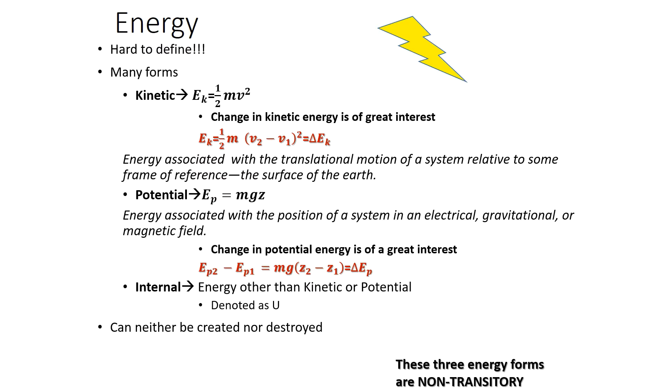Internal energy is any energy other than kinetic or potential energy. So don't ever forget that. And it's denoted as U. And one thing to remember, just like matter, energy can neither be created nor destroyed, but it can be converted into some other form. And we see that a lot of times in life. These three energy forms are non-transitory, and we'll get into talking about what non-transitory is in the lecture.

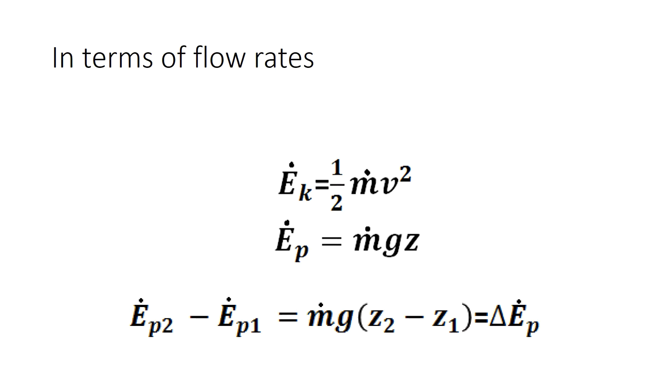In terms of flow rates, we simply just put a dot over things, and we've seen that in the past. So the rate of change in kinetic energy is given by 1/2 times the mass flow rate times the velocity squared. And the change of potential energy is the mass flow rate times gravity times z. We can split this out a little bit, where we express our change of potential energy in terms of changing our z height. And we can do the same for our kinetic energy, where we change the velocity in terms of rates.

Energy crosses our system boundaries in two ways: heat and work are the ways that energy crosses system boundaries, and the direction it was transferred is denoted by sign. So if we add heat to the system, our value is positive. If the system's giving off heat, it's negative. If the system does work, it's positive, and if work's done to the system, it's negative.

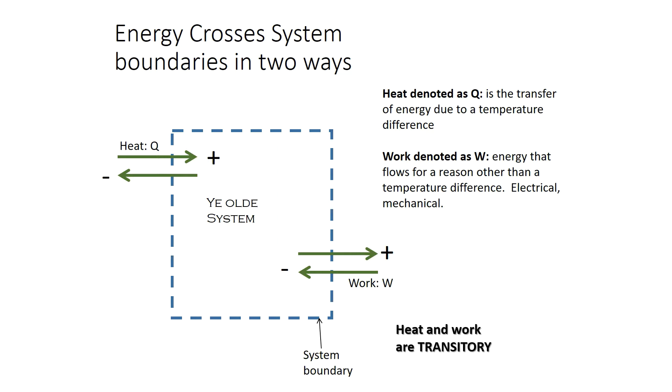And so work, I like this definition: energy that flows for a reason other than a temperature difference, electrical or mechanical. And heat is a transfer of energy due to a temperature difference, and that's denoted as Q. Heat and work are transitory, and they're transitory because they cross the system. Kinetic and potential energy don't really cross the system.

We have types of systems. We have open, so mass and energy cross system boundaries, and most of the problems we have done, like our ore refining problems, are open systems. Closed systems, mass and energy do not cross system boundaries. That's like baking cookies. Also many batch processes are closed.

And then isolated systems are not very common. A thermos is a good example. Your Yeti cooler is another. Baking cookies is closed, but it's not necessarily isolated, and we've talked about that before, how you can see steam coming off of an oven.

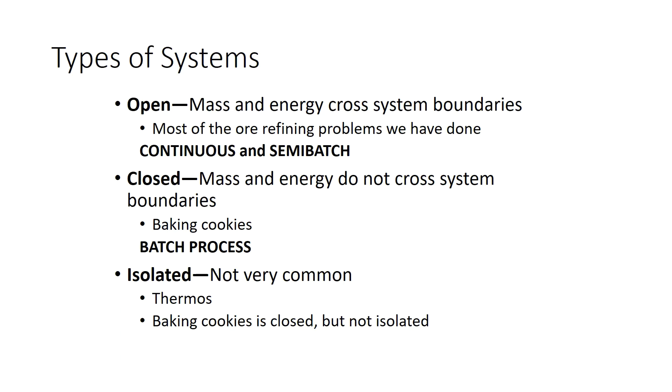Units of energy, we usually use the joule. A joule is also a newton meter, so newtons times meters, or the foot-pound force. And the amount of energy is different for a given process. And so we have these examples. So nuclear fission of uranium is negative 1.6 times 10 to the 10 kilojoules.

Ionization of the hydrogen atom is 2 times 10 to the 3 kilojoules. Oxidation of hydrogen to water vapor is negative 240 kilojoules and so forth. And you can see different processes have different energies. Here's a change of potential energy. So lifting a nickel from the floor to 300 meters in the air is 160 joules in potential energy.

So the signs denote relationship with the system. So signs are kind of important, and we'll be working some problems shortly where we look at the sign sometimes. So pay attention to that.

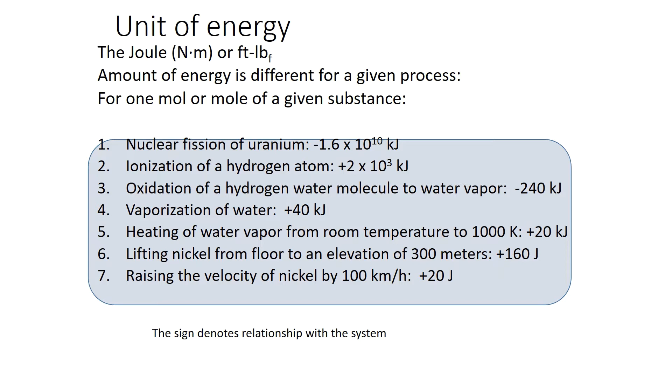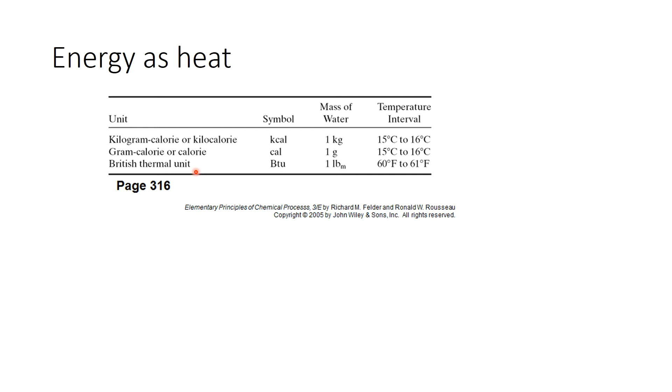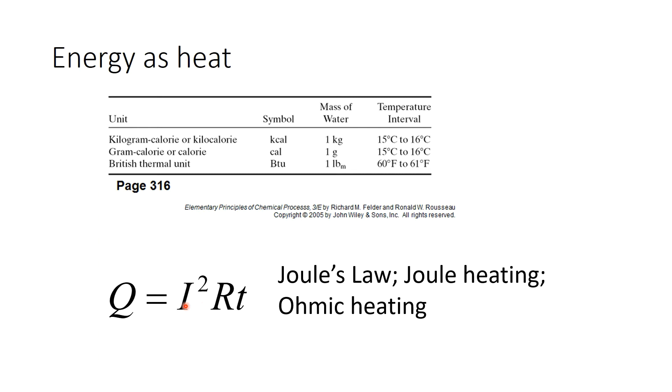Energy as heat, and kilocalorie, gram calorie or British thermal unit are other units of heat. Joule is of course the other one. Joule's law: you can get heat out of an electrical circuit through Joule's law, so Q equals I squared RT. It's also called ohmic heating from Ohm's law. You have two variables, current and resistance, from Ohm's law, in joules.

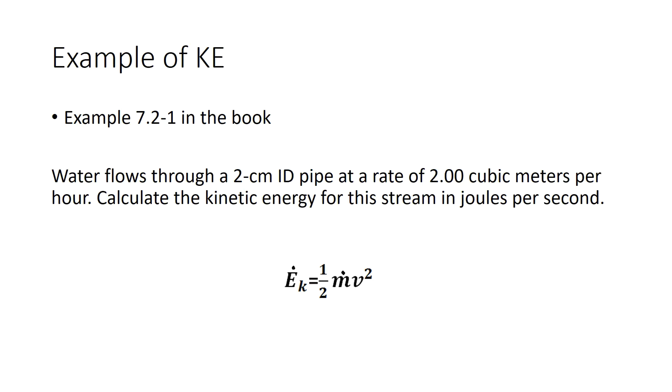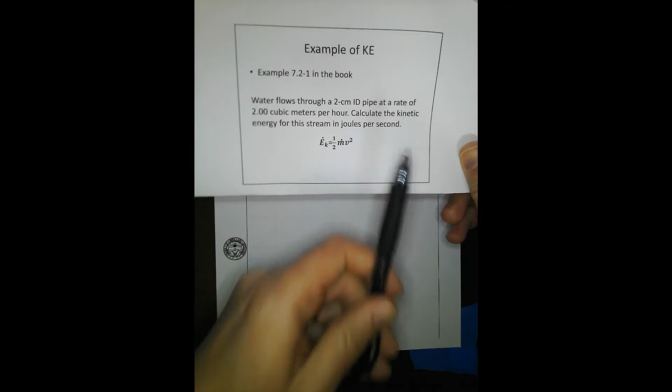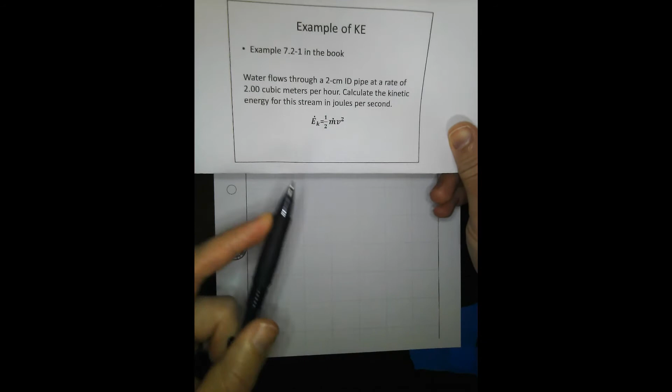All right, so we're looking at example 7.2-1 from the book. This is a printout of the previous slide. We have water flowing through a 2 centimeter inner diameter pipe at a rate of 2 cubic meters per hour, and we want to calculate the kinetic energy for the stream in joules per second. We have our classic Newtonian equation, U equals 1/2 mv squared, but in terms of rates: energy rate equals 1/2 mass flow rate times velocity squared.

And we have a couple of tidbits in this problem. We say 2 centimeter ID. So we have this pipe, and ID stands for, if you're not familiar with it, inner diameter. So inner diameter equals 2 centimeters. We want to know our inner diameter because we need area. Why do we need area? Because we need to find the velocity.

So we want to first find the velocity. And velocity equals the volumetric flow rate over the area. Area equals pi r squared. Kind of went over to the edge there, sorry about that, but we know area equals pi r squared from our given diameter. So we want to calculate our velocity. I'm writing it out simply because there's 2 v's in this problem.

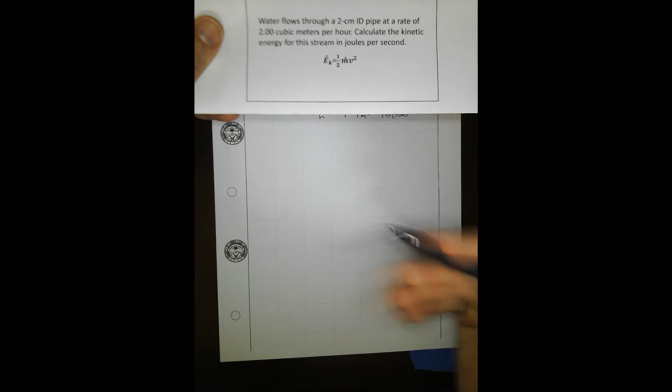Then we were asked to solve in terms of joules per second. Usually I don't have people convert time unless it's asked for. In this case it was, so 1 hour is 3,600 seconds, and our time is going to cancel. So our velocity is equal to 1.77 meters per second, because our units cancel out.

We're going to now find our mass flow rate. All right, so second, we want to find the mass. To find the mass, we can start with our volumetric flow rate. If you want to go from mass to volumetric flow rate and vice versa, we need density. And it's water, so we know the density of water, hopefully like the back of our hands by now.

So we start with our volumetric flow rate, 2.00 cubic meters per hour. Our density of water is 1,000 kilograms per cubic meter, which is one of the constants. And again, 1 hour is 3,600 seconds. And so that equals 0.556 kilograms per second.

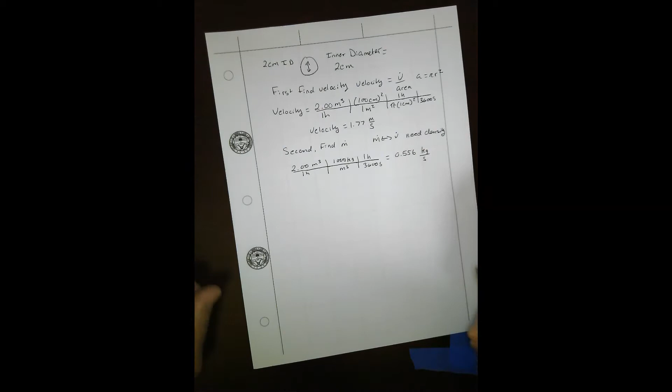All right, so we have two things we need, because if you remember, E K equals 1/2 mv squared. So we have everything we need to know to calculate our kinetic energy. And there's going to be a conversion that we're going to have to use. So we have a conversion factor that we need to kind of consider.

And it'll become more apparent when I actually do the calculation, but we want to remember that 1 joule is 1 kilogram meter squared per second squared, because energy in this part of the class is pretty much always in joules, and we'll see some more examples of that.

So we just want to set up our energy kinetic, and that equals 1/2. We have our mass flow rate, which is 0.556 kilograms per second. We have our other calculation that we got, which was the velocity, and that's going to be squared. So 1.77 meters squared per second squared.

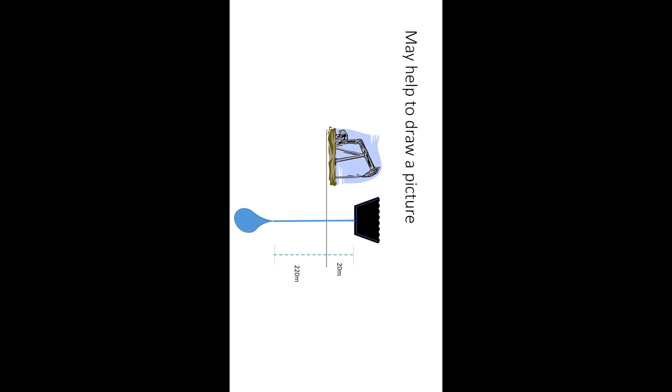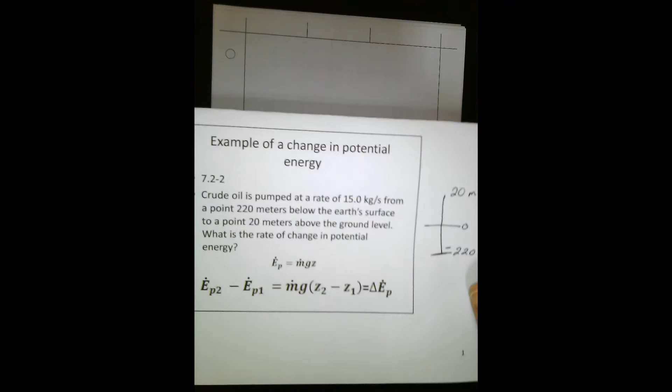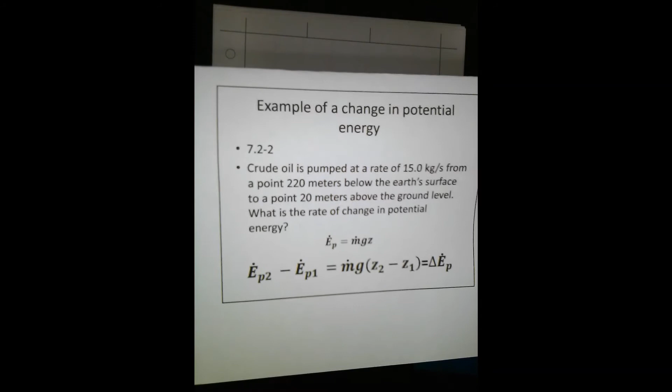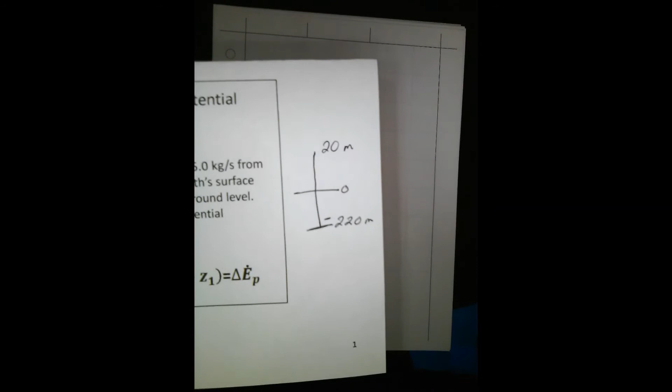Alrighty, so now we're looking at 7.2-2, and this is an example of the change in potential energy. We were talking about crude oil being pumped at a rate of 15 kilograms per second from a point 220 meters below the Earth's surface to a point 20 meters above the ground level, and we want to know what the rate of change of potential energy is for this situation. In the slide, I have a nicer picture, but it helps to draw a picture.

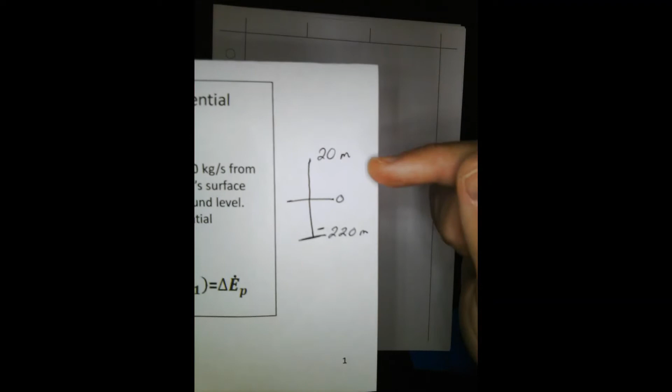And if you take the Earth's surface as a 0 reference point, we see that 220 meters below the Earth's surface is negative, and 20 meters above the Earth's surface is positive. The sign becomes important in this calculation, and we'll see why as we work it out. It helps to write things out. So we have our mass flow rate here, and the mass flow rate is 15 kilograms per second. Yay.

One thing we don't want to forget is our change of potential energy, or delta E dot P, equals the potential energy at point 2 minus the potential energy at point 1, and that is equal to our mass flow rate times gravity, which is a constant, since we're dealing with the gravity of Earth. And here's where the sign comes in: Z2 minus Z1.

And so we want to take that equation into consideration, because the change in Z is what's going to dictate our rate of change in potential energy. And based on our little picture here, we see that we need to consider some signs when we do Z2 and Z1. Anyways, let's just work it out.

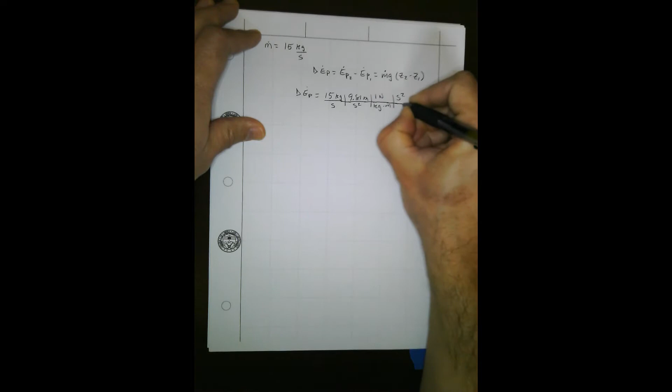We use our same conversion factor, so 1 Newton is a kilogram times meter per second squared. So we're going to have some nice unit cancellations.

And we're going to have our change in Z. And again, this is one of those cases where the problem kind of works itself out, because we know we want to get Newton meters per second. We're missing meters, and what's going to give us that meters is this

delta Z height. And so our Z2 is 20, and that's minus, and here's where the sign comes in, negative 220 meters. And sorry, I'm kind of going off the edge of my engineering paper. Boom.

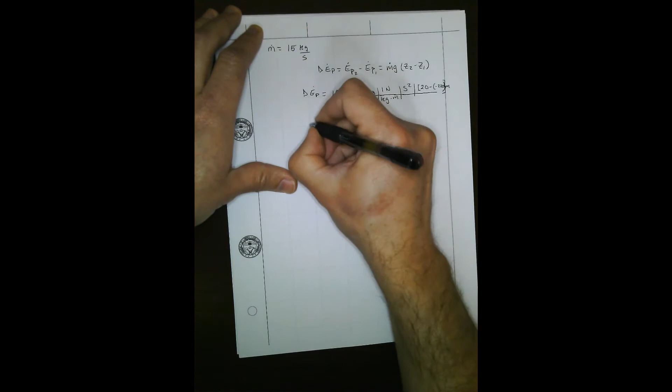Gonna bracket that in, and if I work it out, or punch the numbers in my calculator, the change in energy is roughly 35,300 Newton meters per second, or Newton times meters is joules, so 35,300 joules per second. And so that's the end of that example.

All right, so we talked a little bit about the derivation of the first law of thermodynamics, and we have to consider things in terms of a system. And so we have stuff coming in and stuff coming out of the system, and we've done that in our mass balance portion of the class. And so the movement of mass gives us both kinetic energy and potential energy. And so we have kinetic and potential energy coming in and kinetic and potential energy coming out.

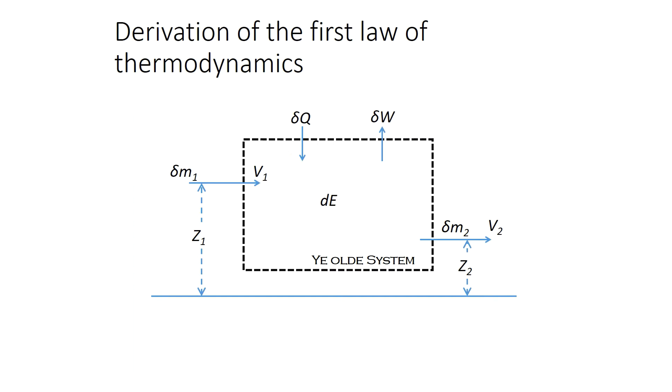We also have heat coming in. This crude derivation of the first law of thermodynamics, and I apologize for kind of the poor quality of this image, but we'll go through it really quick. I have a much nicer slide coming up. So the change in energy from the whole system is made up of these little components. Okay, so we have a mass. That mass coming in has internal energy, kinetic energy, and potential energy.

The mass coming out also has internal energy, kinetic energy, and potential energy. And then you have the whole system, which has a change in heat associated with it, and also a change of work associated with it, whether work is being done to the system or being done by the system.

We can rewrite this equation in terms of a summation. And so this is all of the components. So maybe we have 5 process streams coming in or something. And so it's all of the internal energy, kinetic energy, and potential energy for all the components of both the input and the output stream. The work done to or by the system is still one component, and so is the heat as well.

If we say there's no kinetic energy and no potential energy, we basically start saying the change in energy for the total system is related to the internal energy and the heat and also the work. If it's a closed system, which a lot of our systems are closed, we have no mass crossing the boundary. The change in energy is simply equal to the change in heat minus the change in work.

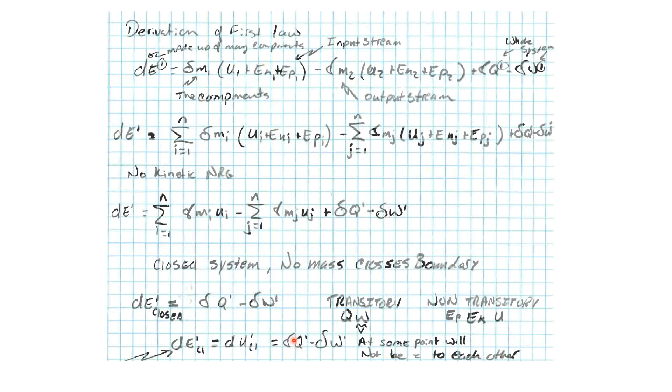And so we can rewrite this. The change in energy in a closed system is equal to the change in internal energy of that closed system, which is equal to the change in heat minus the change in work for that closed system.

We want to make some kind of general statements about the first law of thermodynamics, and this looks very, very familiar to our mass balance problem, where we say input equals output plus accumulation. In general, input equals output in a lot of the problems we've worked out. This is called an energy balance equation because we're not talking about mass, we're talking about energy this time.

If you look at page 318 in the book, the final system energy minus the initial system energy equals the net energy transfer in or out of the system, which is always in the form of heat and work. So our final system energy, and in this case, we're taking into account kinetic energy, potential energy, and internal energy, minus the initial system energy, internal energy, kinetic energy, and potential energy, and heat minus work. I kind of verbally said that.

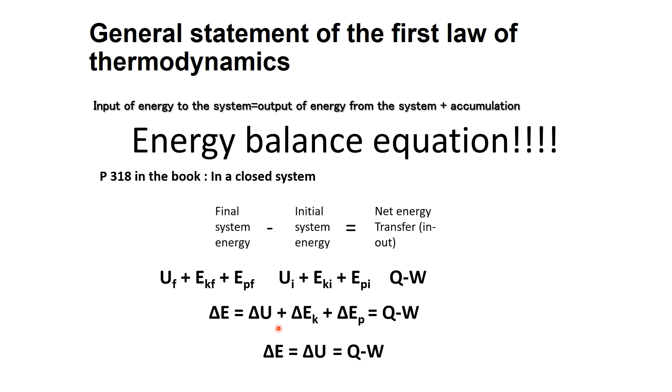We can rewrite it in terms of delta, or change in energy. So change in energy equals change in internal energy plus the change in kinetic energy plus the change in potential energy equals Q minus W. We can get to this where we say there's no kinetic or potential energy because no mass is crossing the system boundaries. If we assume that delta E equals delta U equals Q minus W, this is kind of an important thing. This is also called conservation of energy, or the first law of thermodynamics.

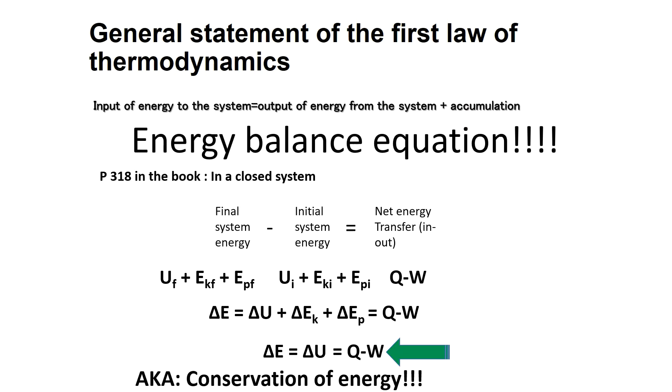All right, so we're talking about types of work that we see in the world, and we have PV work, magnetic field work, shaft work, and flow work. I will tell you that most of the work done in this class is PV work.

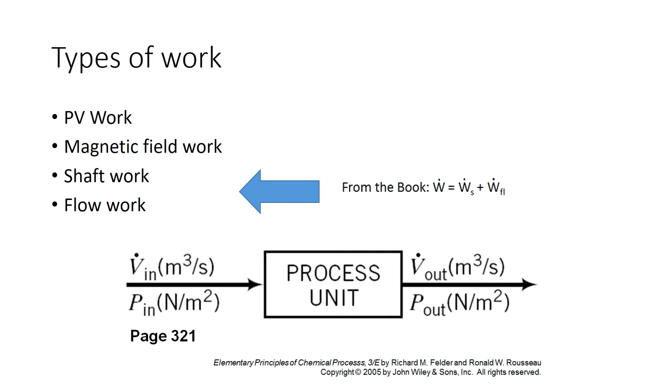From the Felder and Rousseau book, we have total work is shaft work plus flow work. We don't do much in terms of shaft work in metallurgical processes. We do some flow work because we do shove things through process units, and we've seen input equals output, that kind of thing, early on. We're going to go through an example of

a flow work, and it's an incompressible fluid flowing into a chamber with a pressure of 5 newtons per meter squared at a flow rate of 2 cubic meters per second. In the chamber, the pressure is increased by 5 newtons per meter squared, and the fluid exits the chamber with a flow rate of 4 cubic meters per second. What is the flow work rate done on this fluid?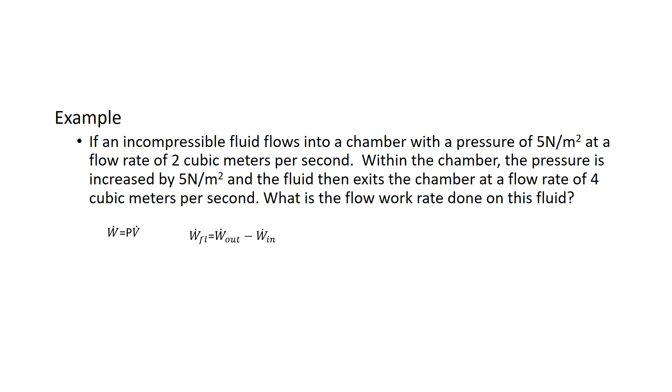And so we want to remember that work is pressure times volumetric flow rate, so it's PV work. In terms of flow work, it's work out minus work in. All right, so we're taking a look here at example 3, and it's basically flow work, and we want to kind of take a look at things in terms of units.

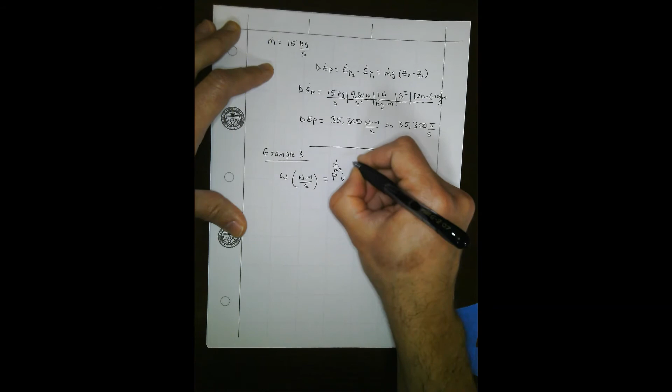So work, the units of work are newton meters per second, and we've seen that newton meters per second also equals joules per second in our previous examples that we worked out today. And we say that work equals PV, so pressure times volumetric flow rate. And if we remember, the units of pressure are newtons per meter squared, and the units of volumetric flow rate are, in this case, cubic meters per second.

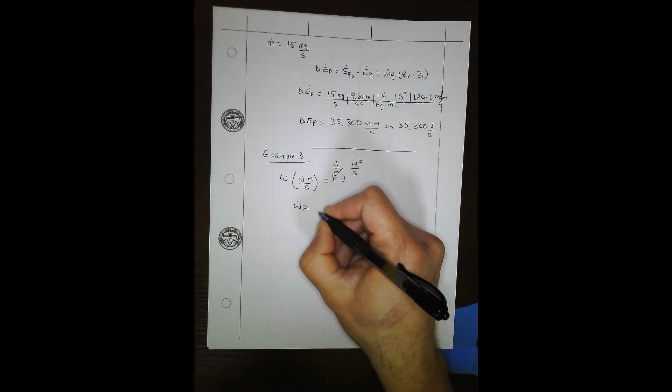We see that the units are going to cancel out, so we're going to get newton meters per second. So unit analysis, I guess we could say that's what we're doing here to prove that work does indeed equal pressure times volumetric flow rate. So it's PV work. We've also talked about work flow. So the rate of flow work equals P out V out minus P in V in.

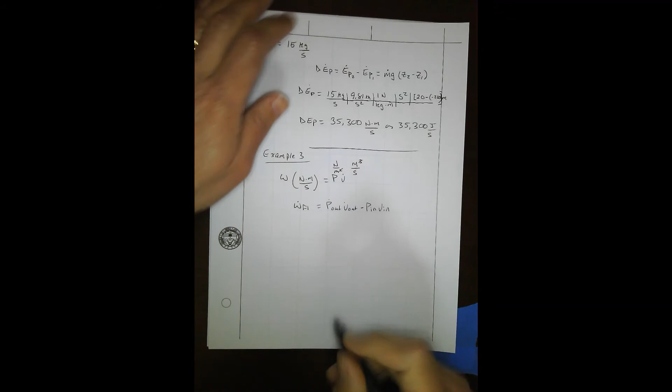And we know from the problem that P out is 10 newtons per meter squared. P in is 5 newtons per meter squared. And we know it's 10 because it said it was increased by 5 in the chamber. We know that our V out is 4 cubic meters per second, and our V in is 2 cubic meters per second.

So if we want to calculate our flow work rate based on this fluid flowing into a chamber, we just simply plug everything in and work out this problem. So flow work equals 10 newtons per meter squared times 4 meters cubed per second, minus 5 newtons per meter squared times 2 meters cubed per second.

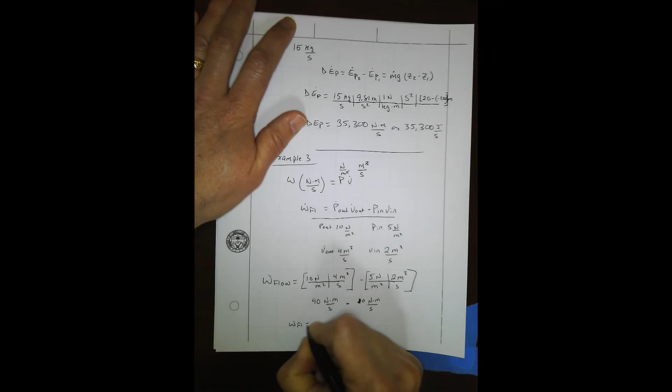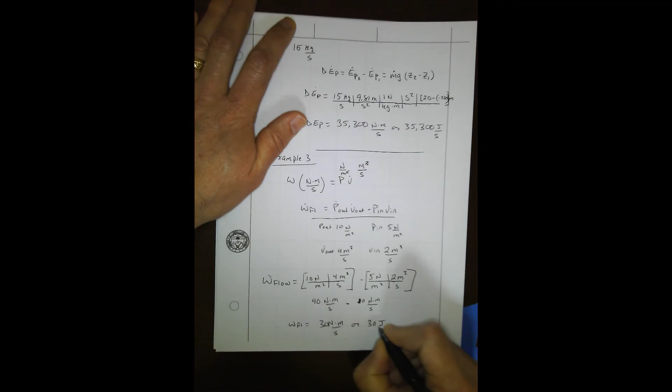And again, our units are going to cancel, so we're going to get newton meters per second, so joules per second, which is exactly the units we want. By my math, we have 40 newton meters per second minus, sorry, excuse me, 10. 2 times 5 is 10 newton meters per second. And so 40 minus 10 is 30. 30 newton meters per second, or 30 joules per second. So that's an example of calculating flow work, and hopefully it is not too daunting.

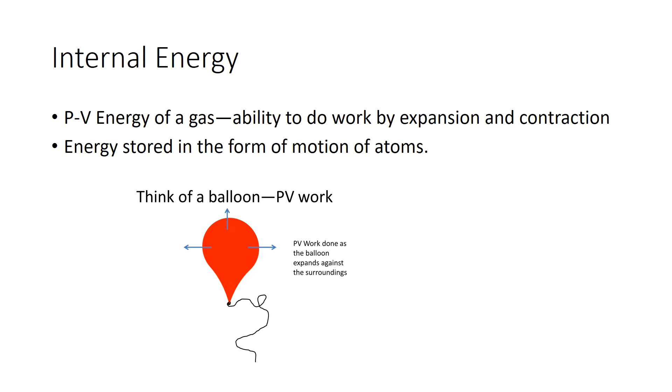We're talking about internal energy now. So we've talked about potential energy and kinetic energy. Now we're going to talk about internal energy. We said that most of the problems in this class are PV, or pressure volume, types of problems. And so if we think about PV, the simplest example is that of a balloon. Pressure volume work is done as the balloon expands against its surroundings. So always envision the balloon.

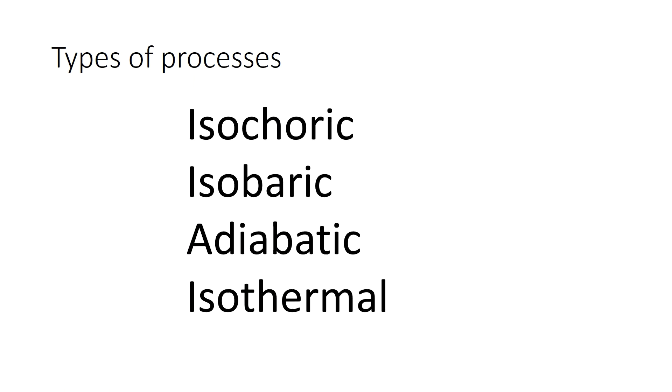There's types of processes that involve PV work: isochoric, isobaric, adiabatic, and isothermal. So let's take a closer look at these 4 processes. We have to remember that we're in a situation where there's no change in kinetic energy and no change in potential energy. So E sub K, E sub P equal to 0.

So what we're left with is delta U, the internal energy final minus the internal energy initial, and that equals Q minus W, or heat minus work. The first process we named was isochoric. It's also called isovolumetric, because it's a constant volume. And that means no work. So here, since there's no work, delta U simply equals Q, but we want to denote Q with a V because it means constant volume.

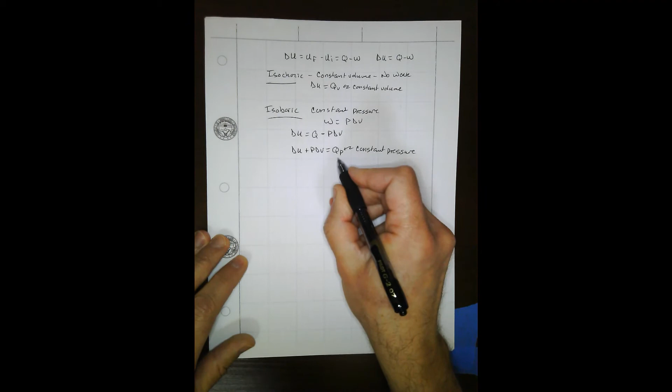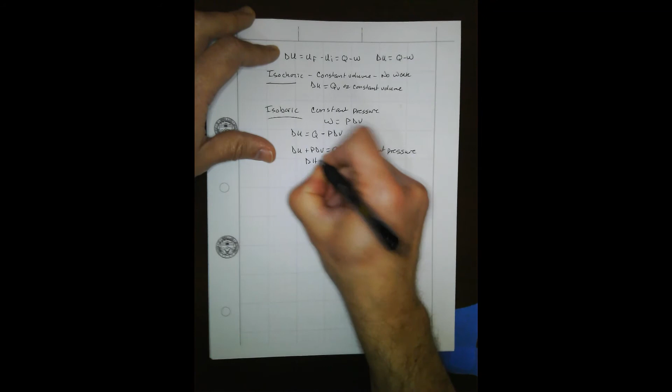Heat at a constant pressure is related to enthalpy, and it's equal to enthalpy. And we'll talk more about enthalpy in our next lecture. But delta H equals enthalpy, and that equals Q at a constant pressure. So we can rewrite this equation, delta U plus P delta V equals delta H. So that's an isobaric process.

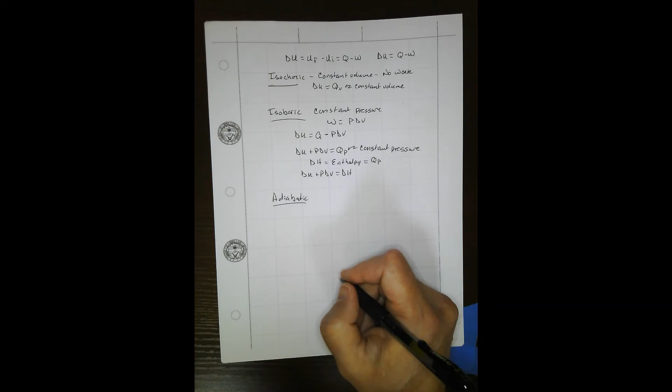The next process that we talked about was adiabatic. And in adiabatic, I always remember Dr. Stafford talking about adiabatic shear bands, and it always forever sticks into my mind. So adiabatic means no heat. So Q equals 0.

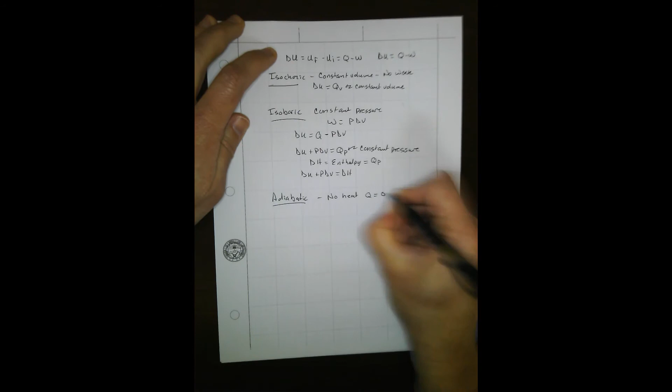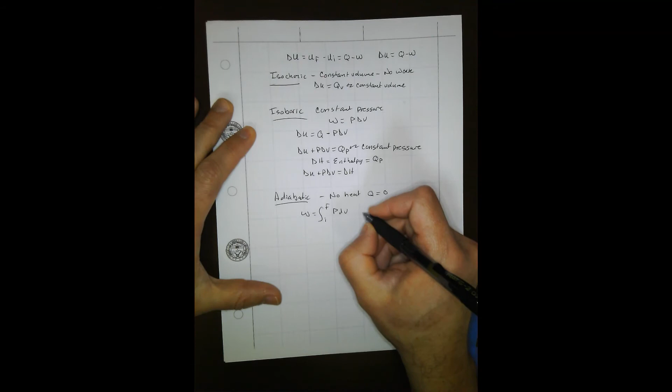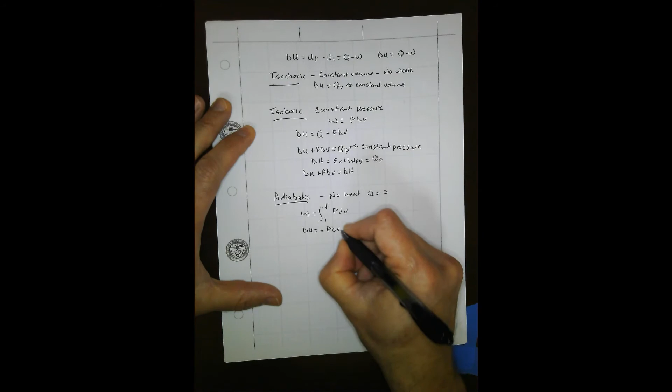We're talking about a process, so the thing we care about is a process. So work equals the integral from the initial to the final state of your process of P dV. And so then we can rewrite this in terms of delta U. So delta U equals negative P delta V, sub R, and R is reversible. So it's a reversible process. And I didn't go through the integral, but it should be pretty straightforward.

The next process we talked about was isothermal. And isothermal, delta U is 0. It's a constant temperature. So delta U equals 0. So Q then is equal to W. And again, we're dealing with a process, and we have this equation again. But this time we're solving for the ideal gas law. And so we have PV equals nRT. So this is for an ideal gas.

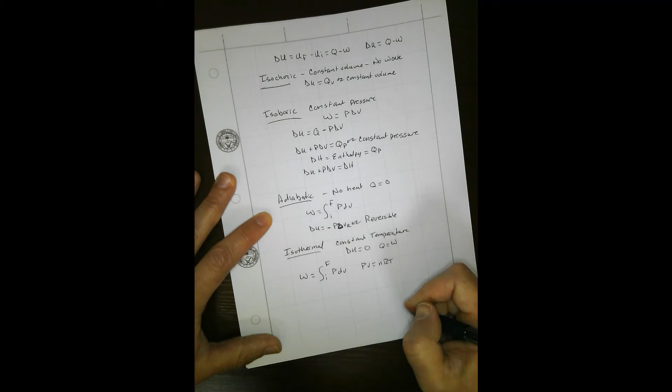And so we can rewrite this equation in terms of the ideal gas law. We can pull out the n. So we've put our volume on the bottom, so we're substituting, we're saying what P is equal to. So we can say P equals nRT over V, and I screwed up a little bit. So V equals nRT over P, and then we're plugging it in, basically. Actually, no, I was right the first time. Sorry.

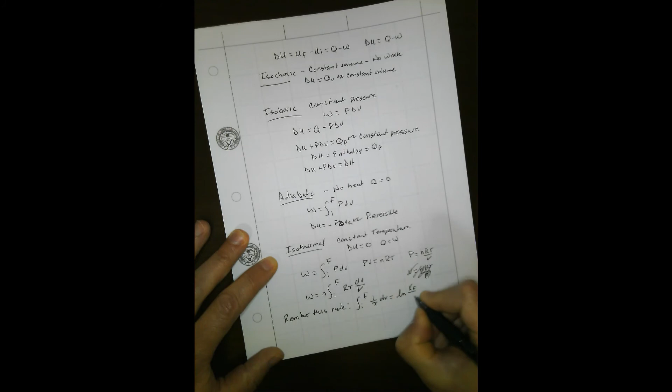So we have to remember this rule, that the integral from initial to final of 1 over x dx equals the ln, or the natural log, of xf over xi. So we can rewrite this equation, work equals nRT ln of Vf over Vi, or nRT ln of Pi over Pf. And sorry about my mistake there.

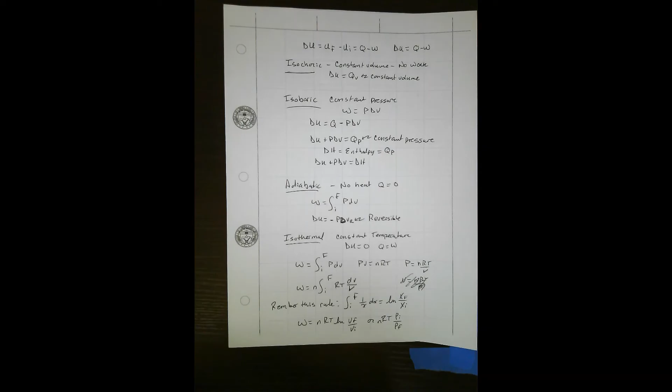All right, so let's take a quick look at an energy balance on a closed system. This is example 7.3 in the book, and it's kind of a two-step process involving a piston. And so we have this piston, and it had 2 kilocalories transferred to it, but a clamp's holding the piston in place. The temperature is reaching 100 degrees Celsius, and it started off at 25 degrees Celsius. So what is the change in internal energy?

You've heated it up, and they're using units that we don't use all the time in this class, like calories. I tend to use joules. But anyway, you're heating it up. You've put this clamp in place so it can't expand. So it's a constant volume process. So you're putting in a bunch of heat, basically. And so you've reached this final state of 100 degrees C.

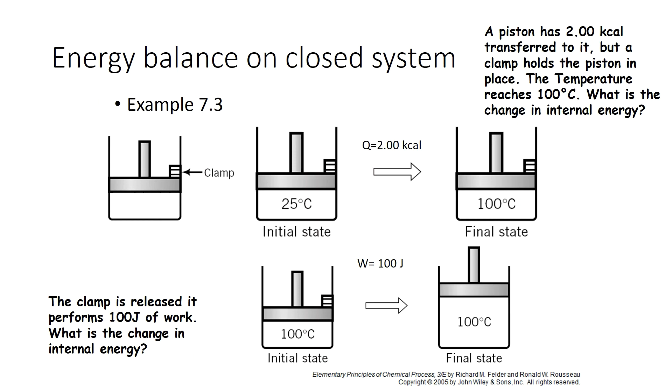The second step is you've released the clamp, and now it does 100 joules of work. And so we're saying, what's the change in internal energy? So it's 2 steps. So we have this first step where we have this piston, we clamp it, we start off at 25 degrees C, and we heat it up to 100 degrees C.

It helps to remember our general equation. So delta E, or change in energy, equals change in internal energy, plus change in kinetic energy, plus change in potential energy, and that happens to equal heat minus work.

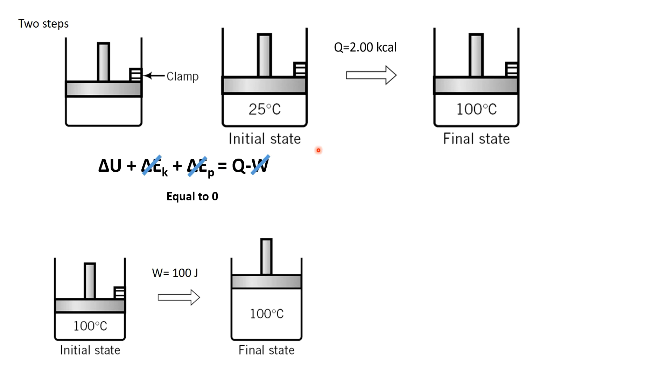We can simplify it a little bit and think of things. Delta U plus delta E sub K plus delta E sub P equals Q minus W. There's no mass really involved in this process, so these guys are equal to 0. There's also no work, so this is an isochoric problem. We said it's constant volume.

So delta U equals Q. So Q is simply equal to the heat that we've put in. I went ahead and converted it to joules because we deal with joules in this class. And so we cancel out. We use our conversion 0.23901 calories per joule, and we get 83.7 kilojoules, or 83,678 joules.

The second step, we have this initial state, we have this final state, and we're trying to figure out change in internal energy. Again, we start off with our equation delta U plus delta E sub K plus delta E sub P equals Q minus W. These are all equal to 0. So why is delta U equal to 0? Internal energy change is equal to 0 in this case because there's no change in temperature. Constant temperature leads to no change in internal energy.

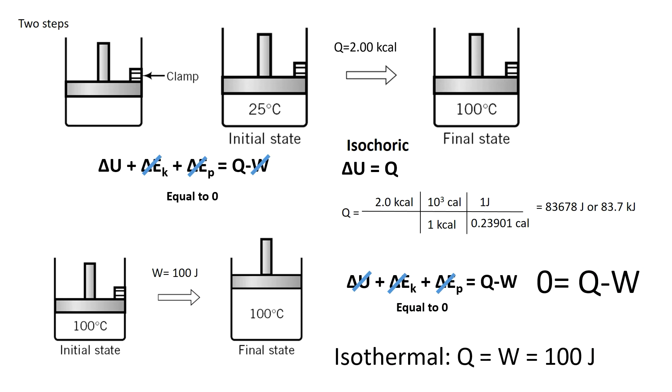That's also isothermal. So for an isothermal process, 0 equals Q minus W, or really Q equals W. So that equals 100 joules. So let's take a look at another isothermal example. Just joking. We have oxygen in O2 form placed in a closed system.

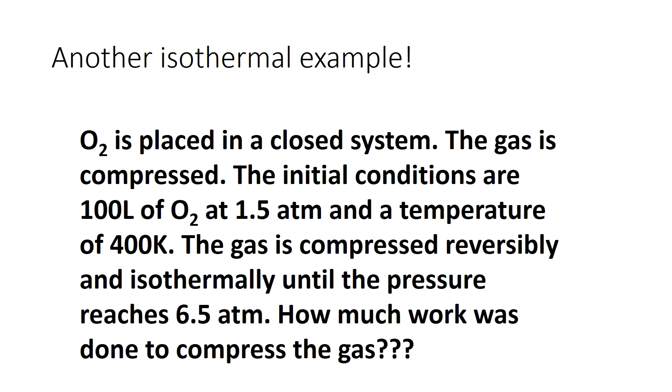The gas is compressed. The initial conditions are 100 liters of O2 at 1.5 atm and a temperature of 400 Kelvin. The gas is compressed reversibly and isothermally until the pressure reaches 6.5 atmospheres. How much work was done to compress the gas? Let's work this one out, shall we? All right, so we have our other example of an isothermal problem. We have O2 in a chamber.

And our initial state is about 100 liters at 1.5 atm and a temperature of 400 K. And it's isothermal, so it's going to stay that way. And so we compress it, and we have two pressures that we've got to deal with. Our second pressure is 6.5 atm.

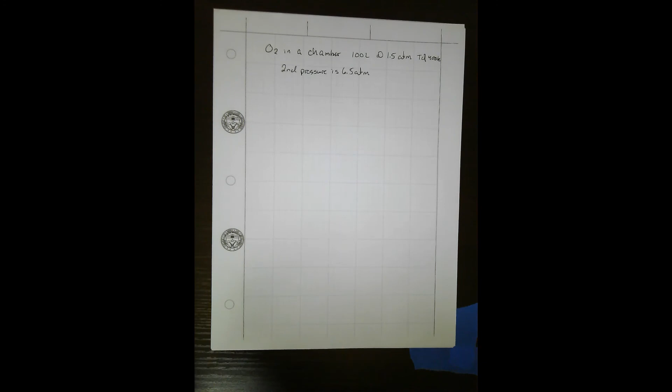And so we just said earlier that Q equals W equals nRT ln VF over VI, but we're given two pressures, 1.5 atm and 6.5 atm, and it just so happens that it also equals nRT ln PI over PF.

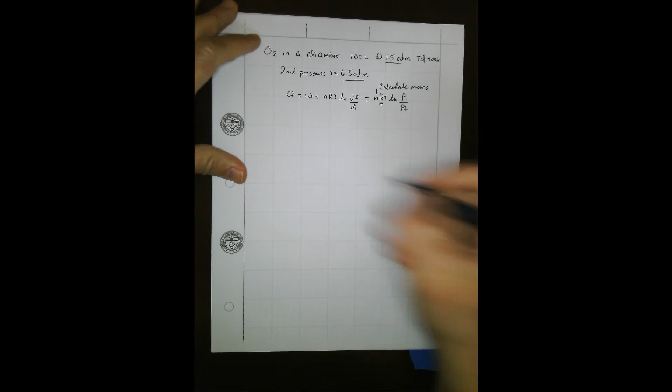So what's left for us to do is calculate the number of moles, and we also have to deal with our gas constant R. There's multiple flavors of the gas constant, and we'll use two to solve this problem. So first find moles. There's other ways to do this, but let's do the ideal gas law. PV equals nRT, n equals PV over RT, and we can find it based on our initial conditions.

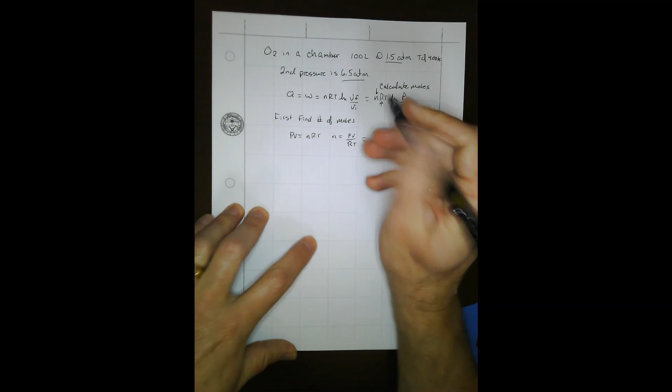Our initial conditions were 1.5 atm over 0.0821, so this is the gas constant we're going to use, liters times atm over gram moles Kelvin, because it seems to kind of make sense. 0.0821. And our gram moles is going to end up on top, so that's what we want.

Volume was 100 liters, and our temperature was 400 K. Yay. And so things are going to cancel out. Atm cancels out, liters cancels out, Kelvin cancels out. We're left with gram moles. So the number of moles turns out to be about 4.57 moles. And now we're just left with a nice plug and chug.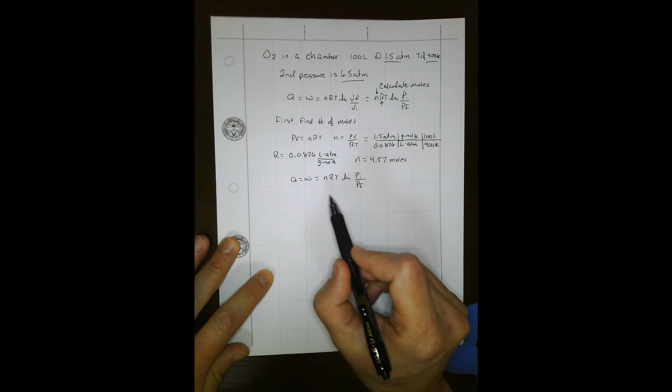So we can say Q equals W equals nRT ln PI over PF, so pressure initial over pressure final. We want joules, and it just so happens that there's a gas constant that gives us units of joules. If you look at this equation, your units of pressure are going to cancel. Our gas constant is 8.314 joules per mole Kelvin, or Kelvin mole, depending on your point of view. So our units are going to work out quite nicely.

Q equals W equals 4.57, which we just figured out, times 8.314 joules per mole Kelvin, times our temperature of 400 Kelvin, and then ln, where PI is 1.5 atm and our PF is 6.5 atm.

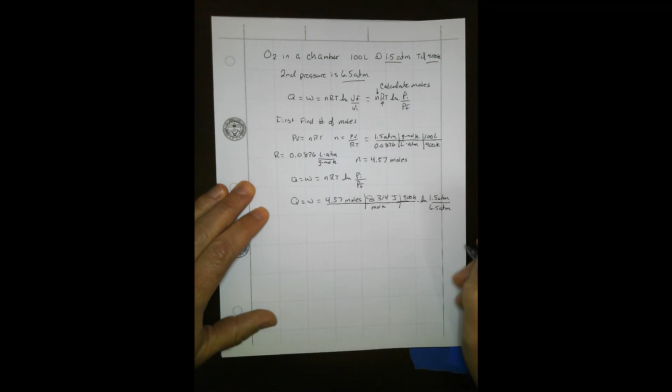Then I plug and chug through my calculator. So Q equals W equals negative 22.9, sorry, 22,290 joules. And the sign is negative. So think about what that means in terms of things crossing system boundaries, because that becomes kind of interesting and important.